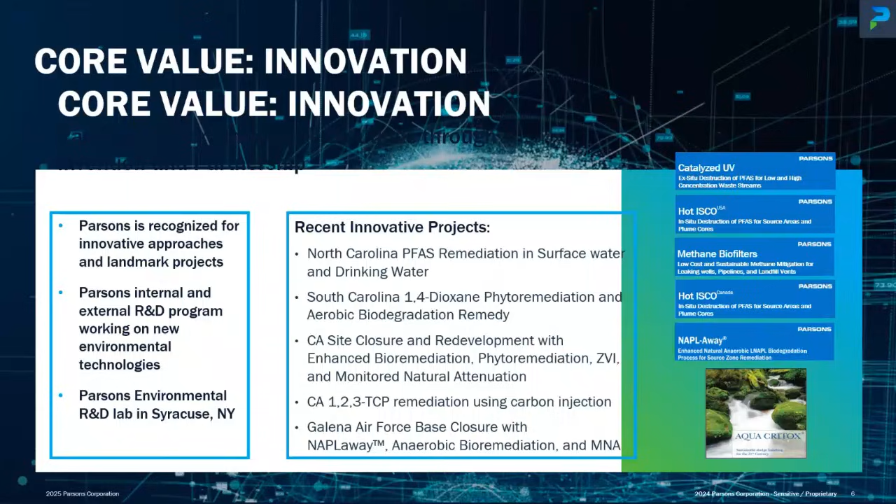Yeah, sure. Thank you all for the opportunity. Hello, everyone. I want just to quickly give you a little bit of background about our company before I get started. I was one of the founders of the TRS group. This is our 25th year in business. We started the company 25 years ago to commercialize in situ thermal remediation technology, and that continues to be our core business for remediation of soil and groundwater impacted by mostly organics, also PFAS now in soil.

We've got patents for electrical resistance heating and thermal conduction heating. A couple of years ago, through our work in Europe, a partner of ours, Martin Cornelsen, started the Cornelsen water treatment company. We learned about his success in creating the PerfluorAd technology, which is a surfactant-based technology that can clean out AFFF from the inner wetted surface of a firefighting system. I'm going to show you how that works. But also, the technology can treat PFAS in water, and we'll talk a little bit more about that too.

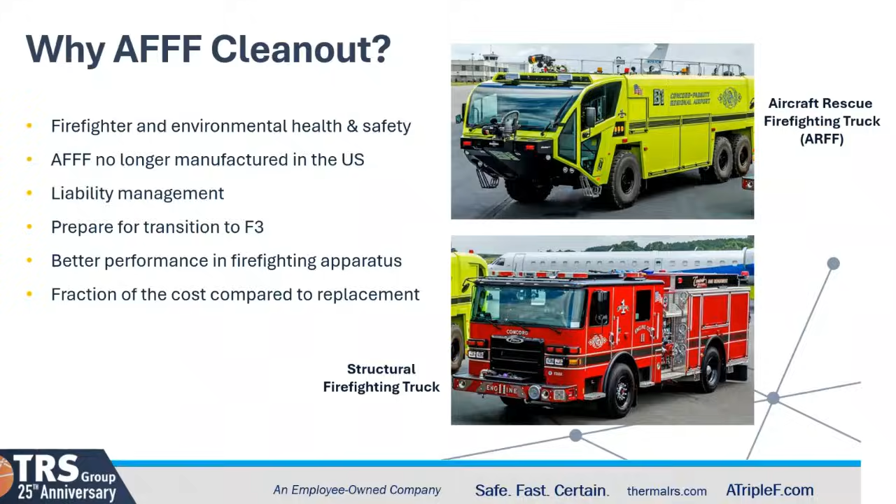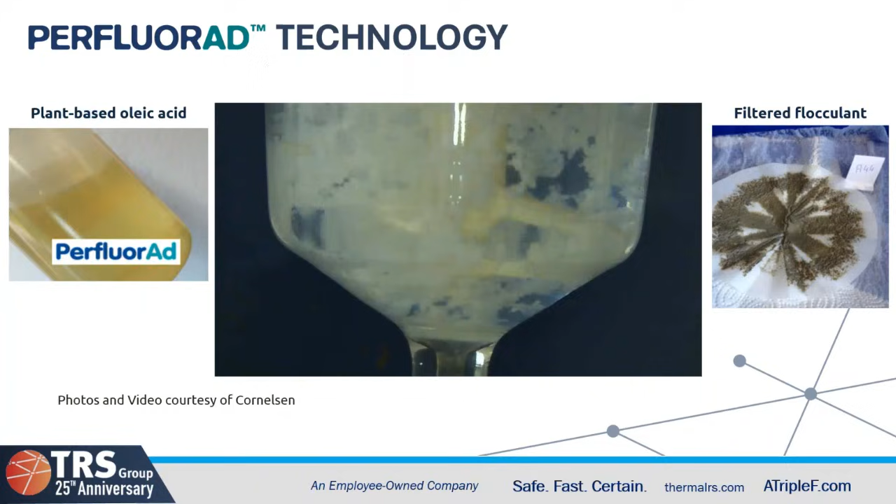And we'll show you more about how this works as we move on here. What we're doing first is we're removing the AFFF concentrate out of the mobile system. By the way, this also works in fixed systems, and I have some data to show you on fixed systems as well, like AFFF storage tanks, and fixed fire suppression systems in a hangar or a building.

But for this example, this is a truck. So we're removing the concentrate from this truck. Same for the fixed system. You remove that AFFF concentrate. That's stored on site for off-site disposal. We're not treating that. And then we do a first potable water rinse of the vehicle, and we capture that rinsate material as well. And that also is too high in PFAS concentration for us to treat economically and in a timely way with PerfluorAd. So both of those two streams are stored on site and then disposed off site.

And then after we've done that, we create our solution in this mixing tank, which is potable water that's heated to about 120 degrees Fahrenheit maximum temperature. PerfluorAd's added into that mixing tank. That gets stirred up so it's very homogenized, and then that gets flushed through the vehicle 3 to 5 times, depending on what we're visually seeing in terms of foam formation. I'll talk a little bit more about that in a minute too. Each of those flushes is followed by a potable water rinse. So we're capturing that potable water rinse in those flushes that we send through the vehicle.

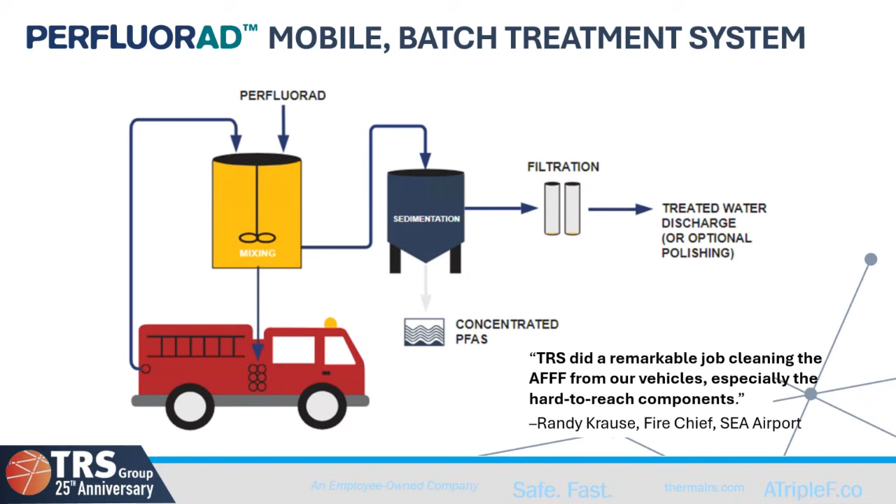And I did not mention, by the way, that we take our first sample in the beginning from the first potable water rinse in the vehicle and send it to the analytical lab, and that becomes our baseline PFAS concentration. And then once we believe we're done cleaning, we take a final sample, compare the two, and we can report on the results.

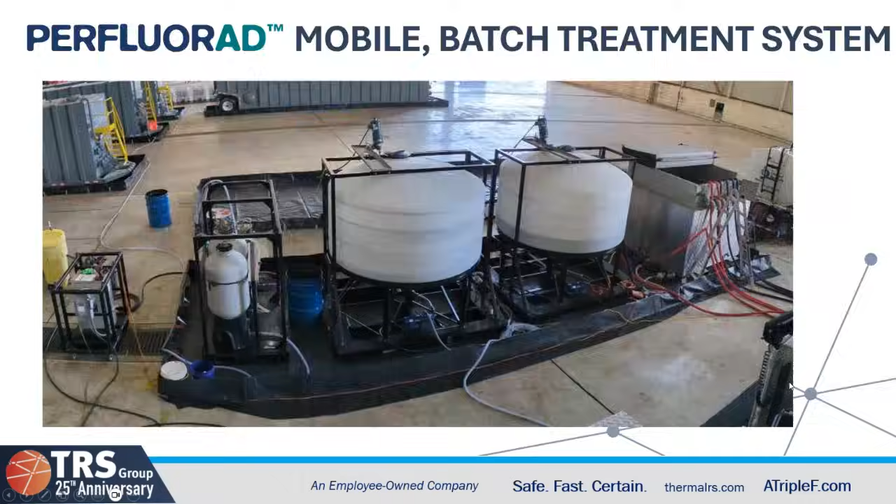Here's another quick video that shows the field operations, how this actually happens in the field. So we see here first, this is our field operations manager, Steve Pistol. He's mixing the PerfluorAd in a heated 5-gallon bucket, getting it really well homogenized. And then after he's done that, he'll take about a 100 milliliter cup of it and walk it over to the mixing tank and pour it in there.

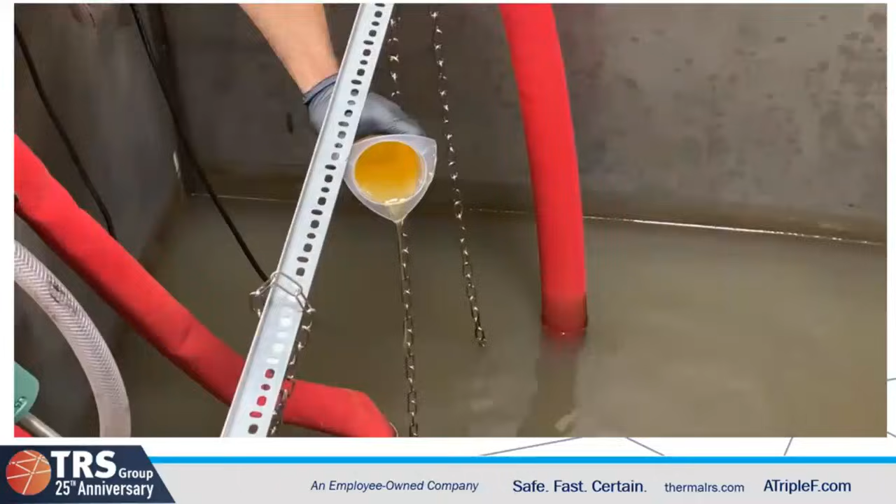This is heated water inside the mixing tank. Pour the PerfluorAd in there, get that solution that will ultimately flush through the truck in this case. There's a stirring that's going on. You can see a little bit of agitation to the water, and there's a little bit of a color change to more of a milky white once that's prepared.

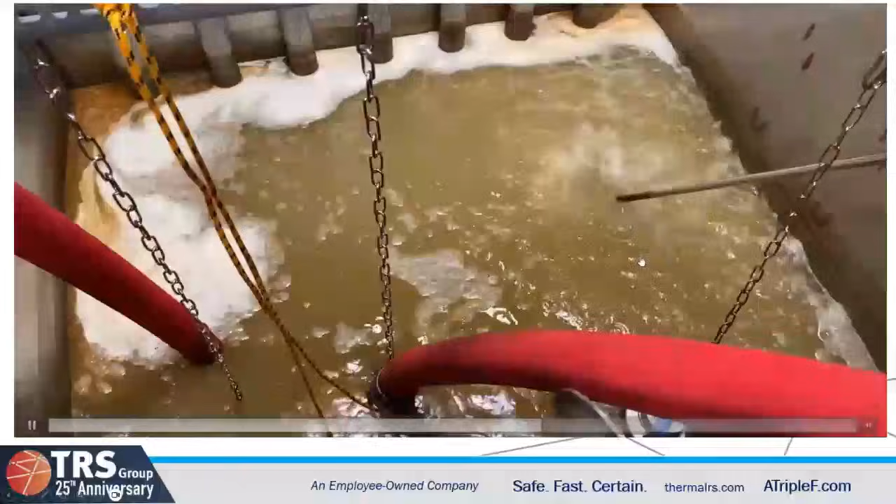And then once that's been prepared, we'll use the venturis in the truck, pumps, external, internal, to flush that solution through the truck, and then capture that rinsate here in the tank that comes back from the truck. And you can see the foam formation there on the surface of the water. That's a visual indicator of when we're done. When there's no more foam formation happening on the surface of that, then we know that we're done.

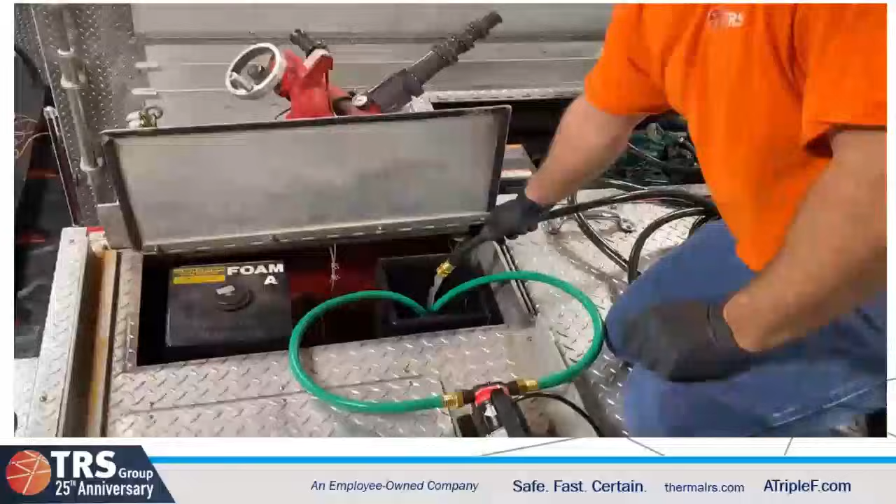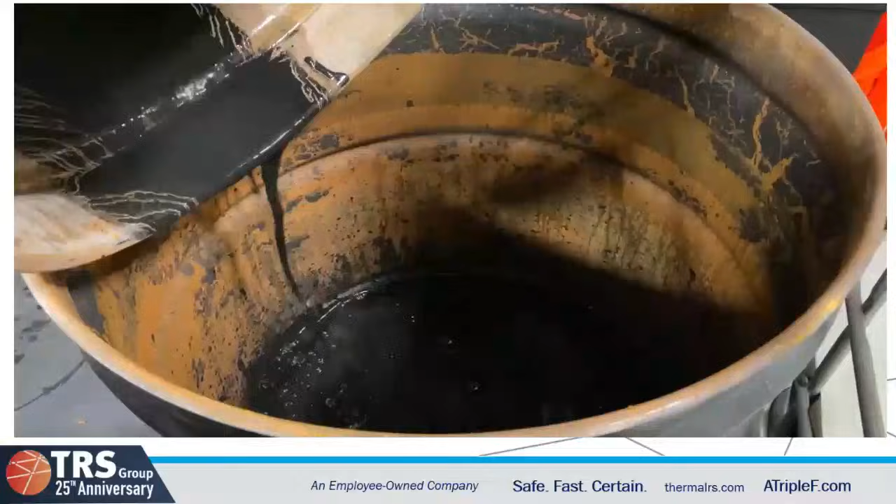And then he's cleaning the tank out here with the solution. And then that rinsate goes over to the sedimentation tanks where the sludge, in this case PFAS and PerfluorAd, from those sedimentation tanks is then put into a 55-gallon drum for offsite disposal.

And I wanted to touch on the foam formation. We're looking down in the mixing tank here. I mentioned foam formation is a visual indicator of when we're done. And the reason that we do that is because analytical turnaround times are too long for us to wait, keep the truck out of service, keep our equipment on site that's not being used. And so it's turned out to be very accurate, and we've proven it with the analytical results. No more foam formation on the surface of the water is telling us we've gotten it as clean as we're going to get it.

And also what you're looking at here inside this tank is a very dirty foam, PFAS, dirt particles coming out of the system. And that's after the first potable water rinse and the first PerfluorAd flush. The point is, it takes more than just a water rinse and more than just one flush of the PerfluorAd solution to get the system clean. And it takes a number of those.

And we try to minimize the amount of rinsate that we're creating, and are actually looking at ways of recycling rinsate too, to lower the volume of that material. But that's just a really good picture, I thought, that helped tell the story there. So you're looking at the sedimentation tank connections, the red hoses there, stirring system, the candy cane metal pipes on the far right. Those are the pipes that are conveying the material back and forth from the truck. And then, as I mentioned earlier too, we're heating that water.

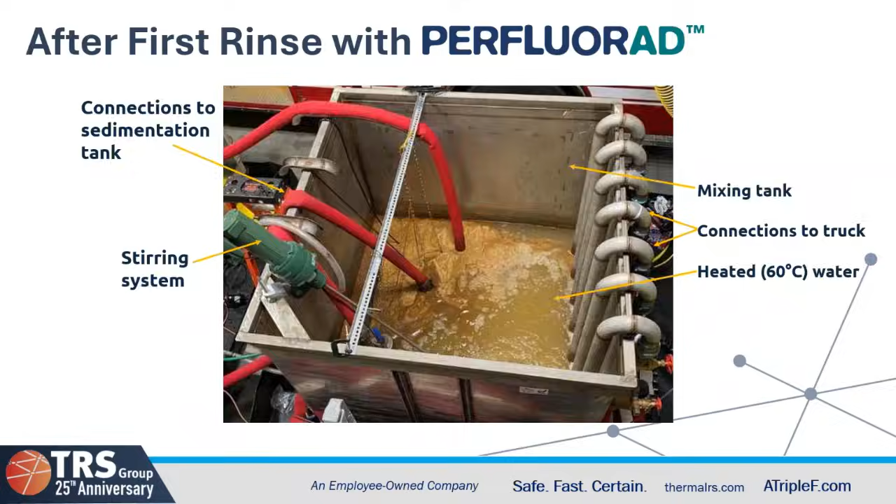So point being, water alone is not sufficient to clean these systems out. And if you're just using water alone, you're running the risk of your system not operating correctly with the new F3 in it, and perhaps having high PFAS concentrations that are still potentially exposing firefighters and the public.

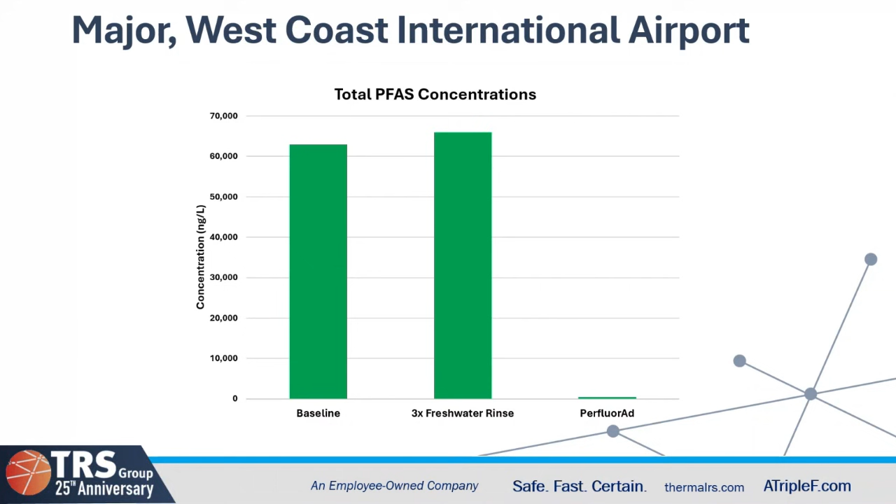So my first project I want to share with you, we did this at the Seattle-Tacoma International Airport last fall, and these are the results, at least from one of the trucks that we did that I'm going to show you. We did 10 trucks here, and one of the really nice elements of this project was really to the credit of Chief Krause, Randy Krause, fire chief at the Seattle Airport, and Megan King, the environmental manager for the Port of Seattle.

They had the vision together to create a regional cleanout center at the Seattle Airport Firehouse, and then open that up to other local airports to bring their trucks in there so they could take advantage of some economies of scale that we can talk about later too. With 10 trucks versus 5 for Seattle, and then King County Airport from Boeing Field brought over 3 trucks, and Bellingham International Airport brought over 2. And had they not done that, their price per truck cleanout would have been much higher than what we were able to give them here, doing them at the airport.

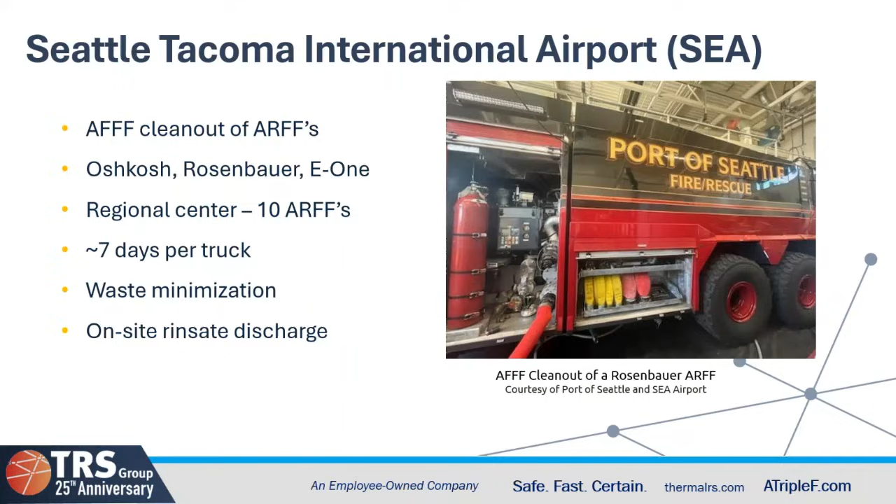And at the Seattle Airport, there were Oshkosh and Rosenbauer trucks, one E-One truck. We did 10 trucks, as I mentioned. It took about 7 days per truck to clean these out. Two of the main reasons we were told that we were selected for this project was our focus on and plan for waste minimization, generating rinsate, recycling it, so we do bring down the volume of that rinsate produced, and also treating the rinsate on site so they could discharge it to the sewer. Saved them a lot of money, as you'll see in a minute.

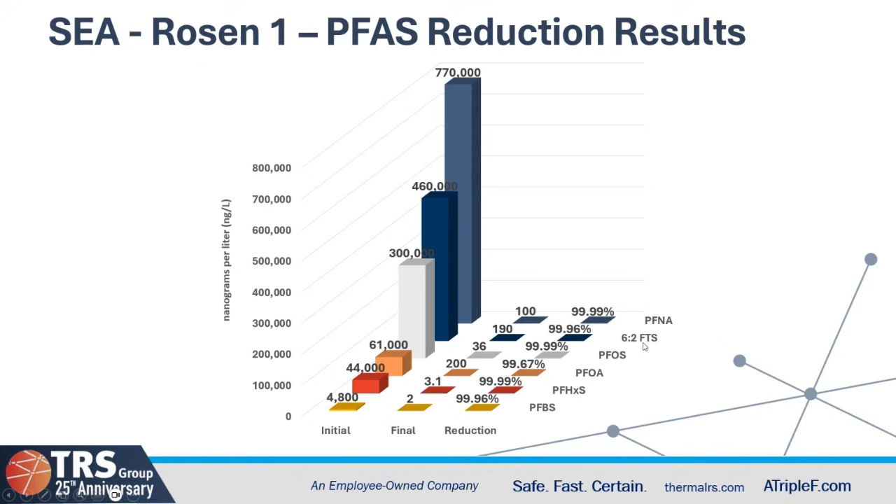I chose these 6 compounds out of the list, the 537 list of 31, because 5 of them, not the 6:2 FTS, are the 5, at least at this time, EPA has said they're going to regulate under the drinking water standard. And they'll set MCLs for them, which they're still in the process of doing, I believe. It has not been promulgated just yet. But then the 6:2 FTS I added in here because that one tends to be a difficult compound to clean out, and we did a good job of it there, and I wanted to share that as well.

So this data here that we're looking at is designed to present what's the difference from a volume standpoint, generating rinsate, and a cost standpoint of either disposing of it on site, discharging it to the sewer, or disposing of it off site. So the first line you see in the table, PerfluorAd, we generated more rinsate, 80,000 gallons, but we were able to treat that rinsate and dispose of it on site for pennies, really, per gallon, $8,000.

Whereas triple rinse below that, you generate less volume of rinsate, but your disposal costs are much higher. And that range of disposal is based on offsite disposal, incinerator, landfill, $200,000 up to $1 million if you're doing total destruction offsite of the PFAS. And it does not include, by the way, many other fees that are added on to those costs from waste disposal companies. So big difference.

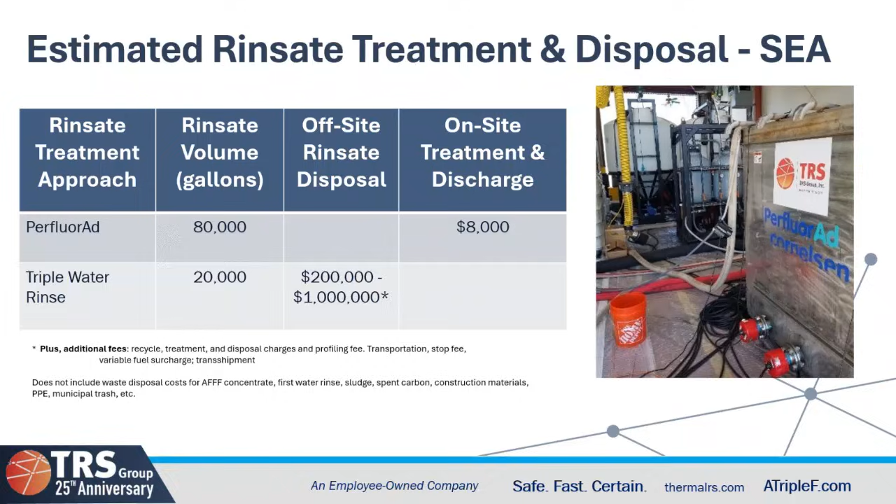So that was Seattle. This is LAX. We also completed this job for LAX, Los Angeles World Airports. It was the client. The 2 airports were Los Angeles International as well as Van Nuys airports. And this project was completed in December of last year. Similar setup, a couple more trucks, Oshkosh, Rosenbauers, and an E-One, 13 ARFFs, and 1 storage tank. And we're getting better and quicker at cleaning these trucks out. We're trying to minimize the amount of time that one of these trucks is taken out of service so that the airport is able to maintain their index.

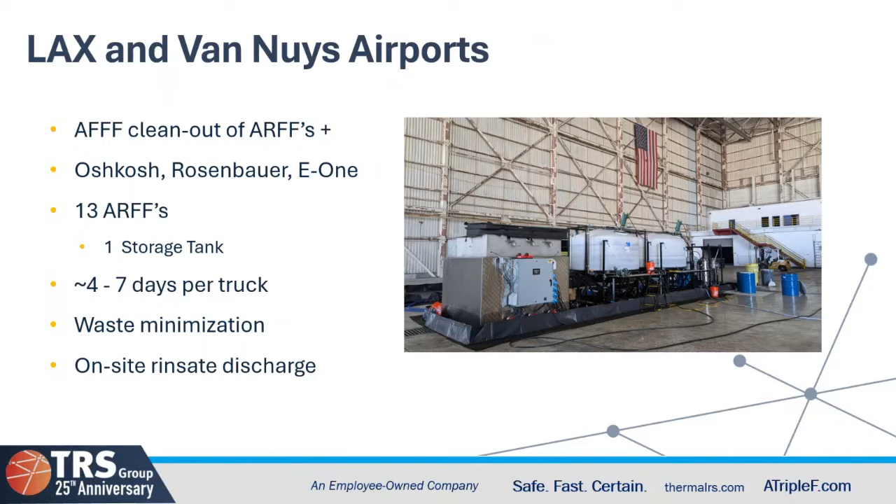And again, we were selected here based on waste minimization and also being able to treat the rinsate on site for discharge to the sewer. And by the way, Seattle was the first project where we were able, on a commercial scale, to work with the local discharge authority, happened to be King County Industrial Wastewater, I believe. They were the ones who actually were able to provide that authority to discharge on site. And at LAX, it was the local sewer authority. So those are the first two projects where we've been able to do that. And it's a big value added for this technology because it saves that money versus offsite disposal.

This is the data for all 13 trucks and the one tank that we cleaned out for LAX and Van Nuys airports. This is in total PFAS, as you see, and then you can see down below here, truck 1 through 13 with that tank over here. The blue columns, the tallest ones, are the baseline concentrations. And then the yellow are the final, and the green is the percent removal. And I've added the percent numbers here at each truck and tank so you can see what those percentages were. But it averaged out about 99.92% PFAS removal from all of these apparatus.

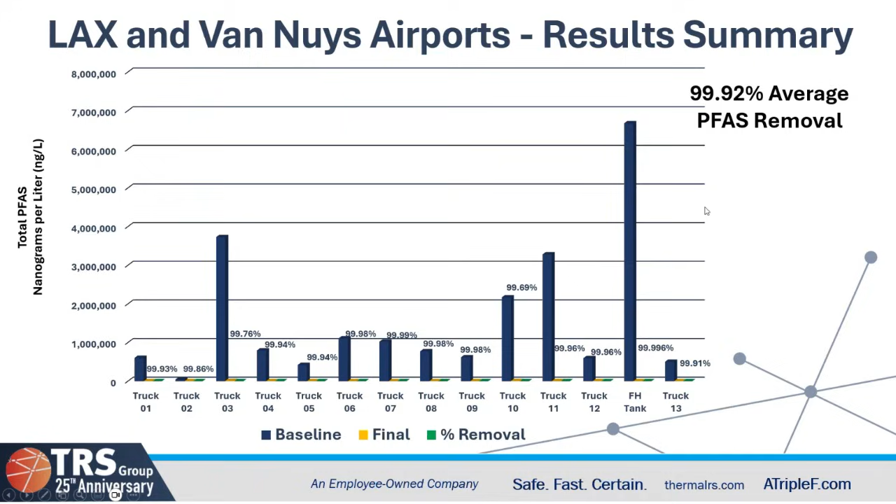And I have this data point also for the rinsate discharge. This is one tank out of several showing you total PFAS pre-treatment in the first bar here, just over 2 million nanograms per liter. Post-treatment in the middle, down to 10.5 nanograms per liter, and the large percent reduction that we achieved here so they could discharge that rinsate to the sewer.

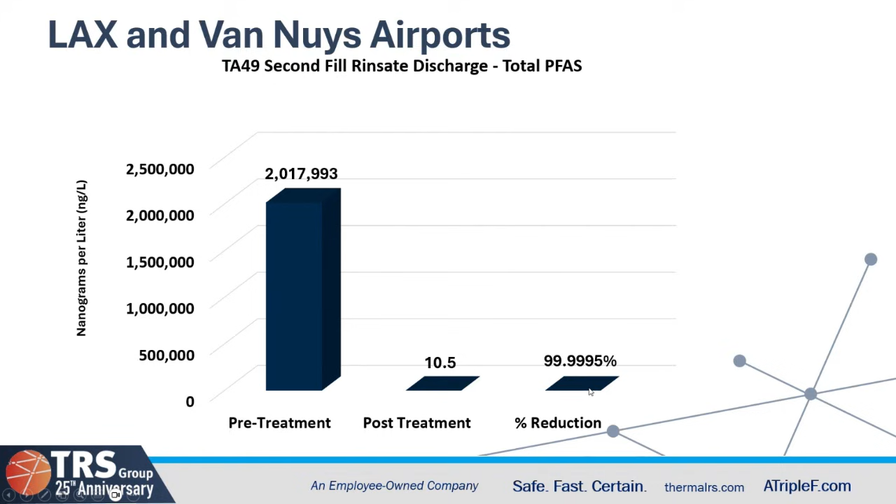And then cleaning fixed systems. So that was mobile systems. Now I'm going to touch on cleaning fixed systems. And by the way, with Cornelsen's work in Europe and ours in North America, mostly the United States, the two companies combined have cleaned out 150 firefighting trucks and about 50 fixed systems. Most of those are Cornelsen's. We've done roughly 60 truck cleanouts and just a couple fixed systems, small systems. So these examples are from Cornelsen's experience cleaning fixed systems, mostly in Germany.

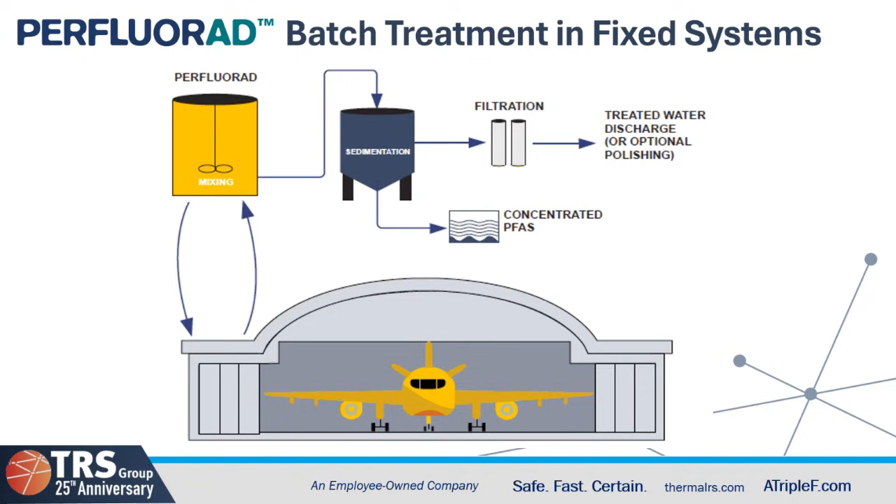And it's the same setup, really. You remove the concentrate out of the system, in this case an airplane hangar, from the storage tank and wherever else there may be any AFFF concentrate that you can get out of the system. You run the process through only the components of the system that have been impacted by AFFF. That tends to be the storage tank, the proportioner, and maybe some small sections of piping, but not the whole system, because oftentimes the whole system has not been impacted by AFFF, but it does happen. So similar type of a setup as with a mobile system.

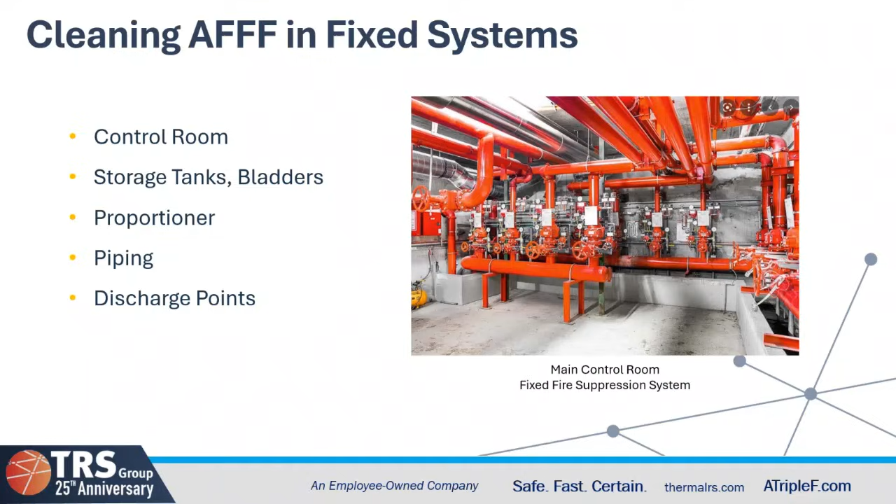And cleaning out these control rooms, as I mentioned, storage tanks, bladders, the proportioner piping, some discharge points perhaps, but not the entire system if it has not been impacted by AFFF. So we're really coordinating with the service team. We partner with different fire engineering companies that have designed and perhaps constructed these systems. It's important to coordinate with them for their experience and knowledge of the system. In some cases we remove the bladders if it's a bladder tank and clean that out. We'll use defoamer and a water flush to minimize the amount of foam that's generated.

Recirculating the PerfluorAd solution in the parts of the systems that we're focused on cleaning out, similar to what we do in a mobile system. Multiple flushes followed by water rinses, agitation as best we can, and then treat the rinsate on site so we can discharge that rinsate. And it is really a contact game versus pressure. We want to make sure that where the AFFF has been in contact with the interior wetted part of that system, we contact the PerfluorAd solution with that part of the system.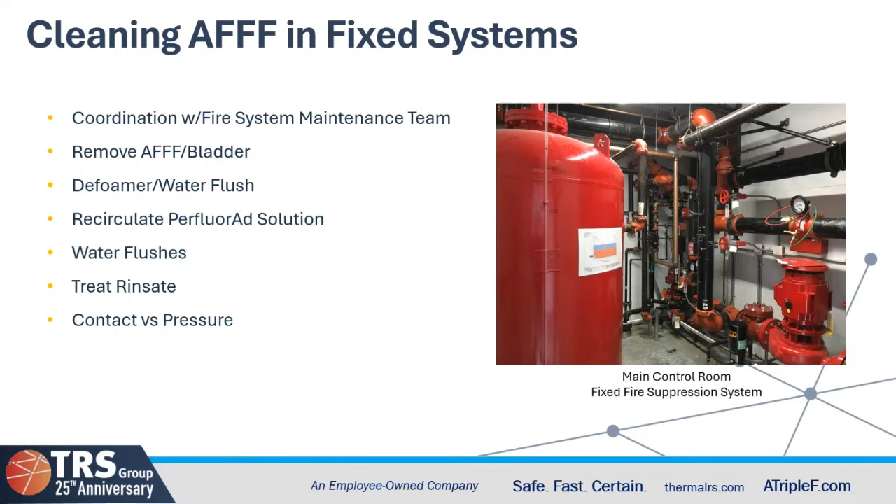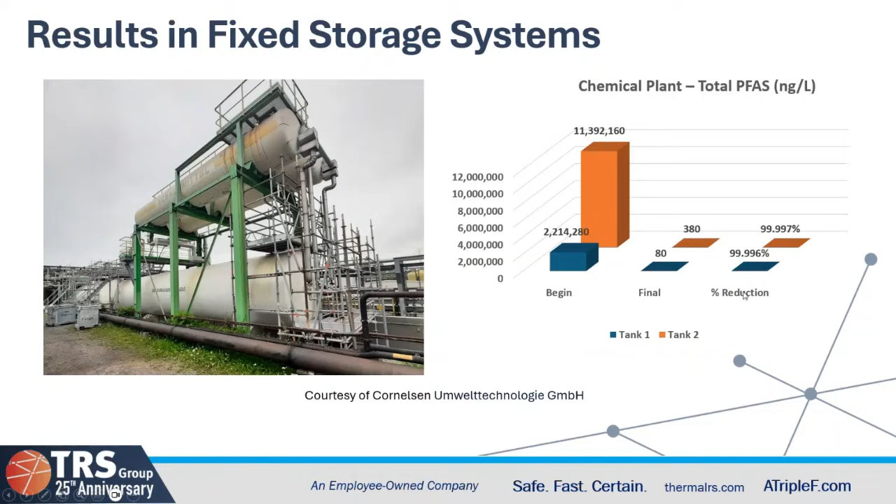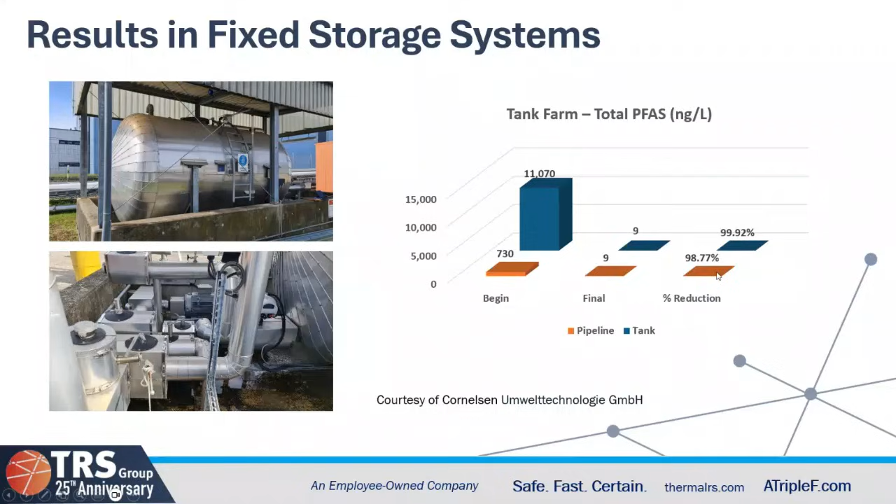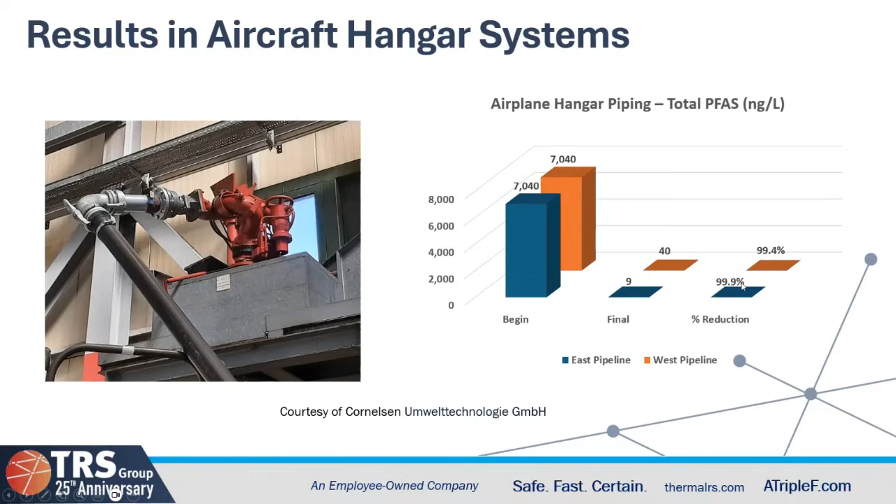So here's some results. This first one is the storage tank system at a chemical plant in total PFAS nanograms per liter. See the beginning concentrations for tank 1 in the blue and tank 2 in the orange, final concentrations, and the percent reduction for cleaning out these tanks. And then another tank farm example showing beginning, final, and percent reduction for both a pipeline, which is the orange, and the tank in blue, for close to 99% removal of the total PFAS at the tank farm. And then in a hangar system, again the tank, the proportioner, a very small part of the pipeline: beginning concentrations for the east pipeline in blue, west pipeline in orange, final concentrations, and 99+% removal of the total PFAS out of that system as well.

So key points, I hope I conveyed to you all, and if not, I'll convey them here. This is an environmentally safe solution. It's a biodegradable oleic acid surfactant that's used with heated water, agitation, flushing, followed by rinsing, to clean out the system 99% plus. We can achieve low PFAS objectives as we've shown. We're doing now another major airport, two actually, one in California and one in Colorado.

We have not observed rebound on a commercial project. It has been looked at by Chief Krause. He has a plan at Seattle Airport to look at rebound at different intervals throughout the rest of this year. He's looked at 2 months following cleanout already. There was no change in the PFAS concentration, so no rebound there. And I say no rebound on a commercial cleanout because we did see rebound in an ESTCP project that we did a couple of years ago at Tyndall Air Force Base. And there are extenuating circumstances that you have to account for and understand. I'm not going to go through all those right now, but happy to talk about them later if somebody's interested. But that's been the case.

We are able to not only clean out the system, but provide rinsate treatment and disposal of the rinsate on site. It saves a lot of money. It's really the way to go if you can get permission from the local authority. So far, we've been able to do this in 3 states: Indiana, Washington, and California. And I do see that growing, but sometimes it's not possible and you have to do offsite disposal.

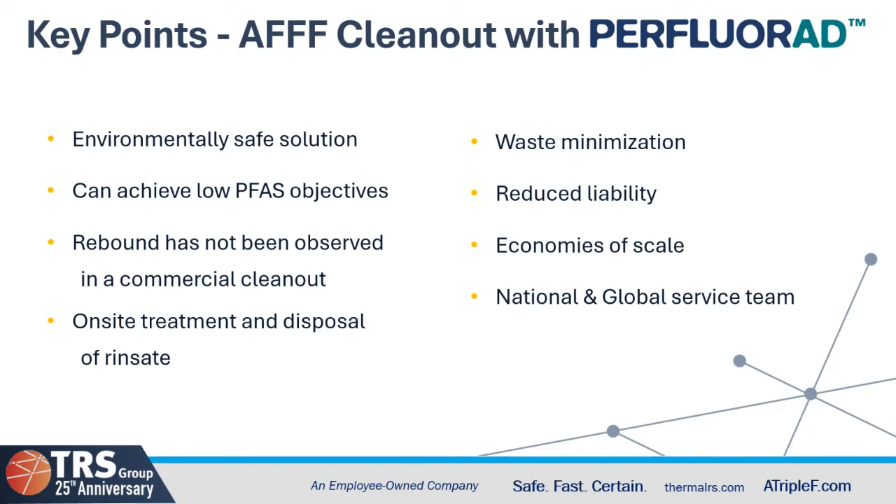And then we have a national and global service team to support customers really around the world in doing this type of work. Anybody have any questions?